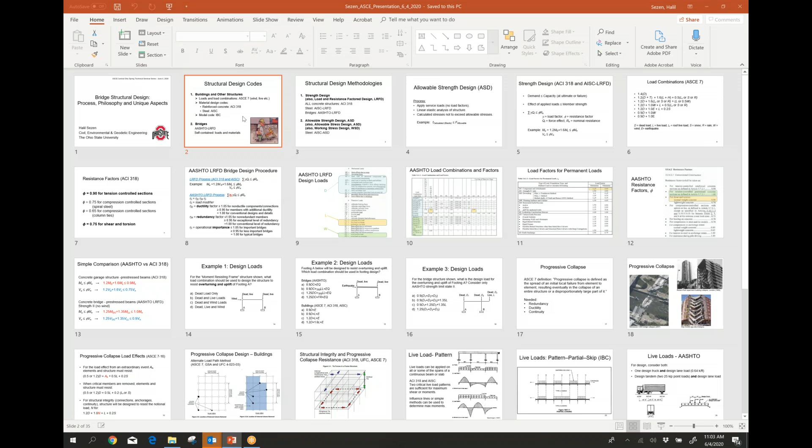Then if you're... Yes, sorry, we're not seeing this. Are you sharing the screen? Because we're not seeing anything. Oh yeah, something happened - this whole thing covered my... All right, do you see it now? Yes, we see the entire - okay, slide. For some reason, the chat screen on the side covered my entire screen. So please remind me if something goes wrong again.

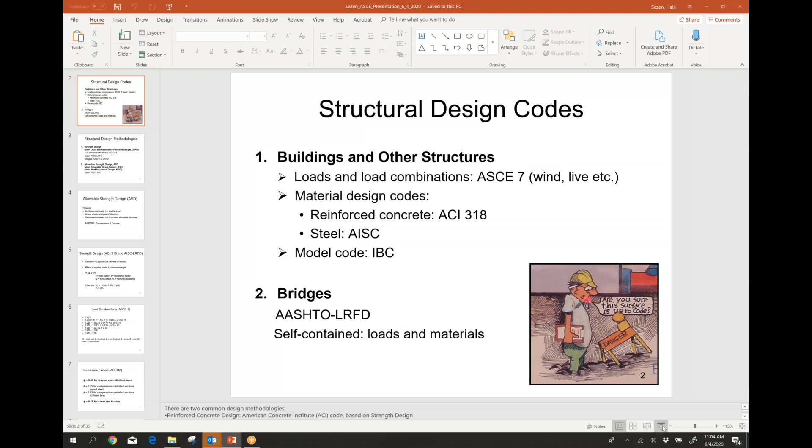All right, so I was talking about ASCE 7. That's the standard that governs all load calculations. But then if your structure is a concrete structure, then you must follow ACI 318. Or if you have a steel structure, then you have to use the AISC construction manual where you can follow either LRFD or ASD, but AISC is the governing code for steel material. And if you have a timber structure, then you have to follow NDS. A bunch of codes are governing the design of certain materials. And we also have this umbrella or model code called IBC, International Building Code.

That makes things very convenient, because for counties and states and cities, if they want to deal with many different materials, it is very tough to adopt fire code and ACI and AISC differently. IBC pretty much combines all of them. So if the city of Columbus or Franklin County or whatever says we are adopting IBC, they automatically adopt ASCE 7, ACI, all these codes, and IBC adds a little bit of exceptions to that. Pretty much it is the same thing as other codes - there may be a little bit of modifications here and there. So this is how the system works for buildings and other structures.

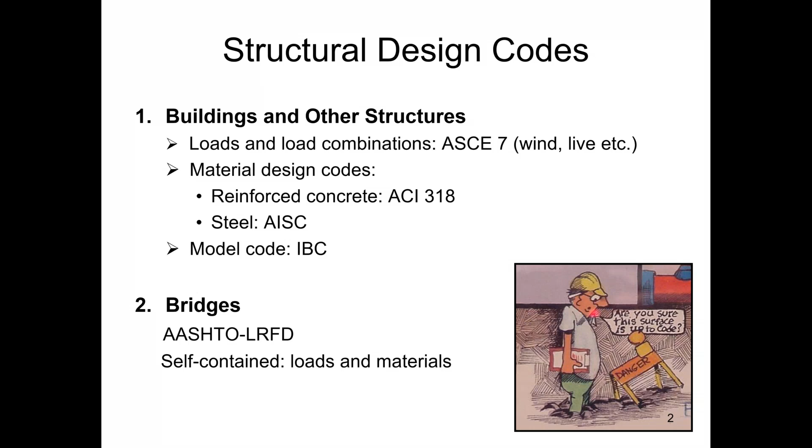Now in this presentation, I will be mostly focusing on ASCE 7 for load calculations, and I will keep comparing AISC or IBC to AASHTO just to show the differences between the philosophies or thinking of these design codes. So it will be a good idea to keep in mind what ASCE 7 is, what IBC and ACI mean for building or other structural design, to understand how things work.

So if you are designing a structure out there, any structure, at this point in time we have two different methodologies. The first one is the common one, and probably the second one will disappear over the next maybe 10, 20 years, maybe longer. The first one is called strength design, or load and resistance factor design, LRFD.

Concrete structures, whether precast structures governed by PCI or ACI, switched to LRFD or strength design completely in the mid-1970s. So since then, all concrete structures are designed following LRFD. There's no other way, there's no other option.

Versus steel structures, even today, can be designed either by this LRFD or the ASD, which is the second methodology. You have the option as a designer to pick and choose. It is the same story with masonry and timber.

Intentionally, I'm not talking about masonry and timber because they are less applicable for bridges. They are more or less like steel material as well. They are in the stages of shifting from ASD to LRFD.

Older engineers tend to stick with ASD, and they like it because ASD is easier. But technically, from the theory point of view, ASD has some deficiencies. So the future is LRFD and strength design. That's the right way to go, but it takes time to switch to that methodology. So just to put it out there, we have those two options.

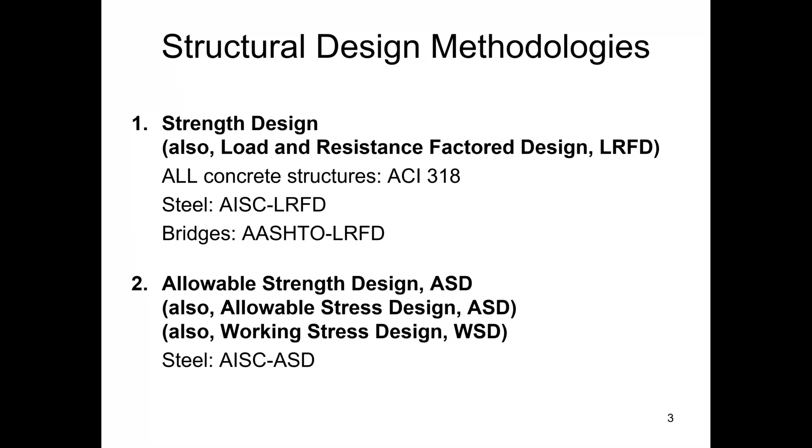As I was saying a few seconds ago, all bridge structures starting with the 2010 edition of AASHTO had to shift to LRFD completely. At this point in time, bridge design follows the LRFD procedure.

Very briefly, what is allowable stress design? If you have a bridge structure, you need to check your stresses and deflections and many different things, in addition to design of individual components. So all you do is take the loads that are supposed to be applied on the structure during its lifetime, and you do structural analysis.

Then you calculate the stresses in terms of stress checks, for example. The first term that you see here is the stress that you calculate from your structural analysis, and then you compare that with the allowable stress for that material.

So if this is, for example, a steel structure, then AISC code says for the design of a beam, the allowable stress is equal to, let's say, 60% of the yield strength of the steel. If your calculated maximum stress is less than that limit, you are done. If not, you have to go back and change your design.

Same thing for masonry or timber or whoever is following ASD. So the process is relatively straightforward and simple. That's the reason older engineers don't want to shift to LRFD. So this is how ASD works.

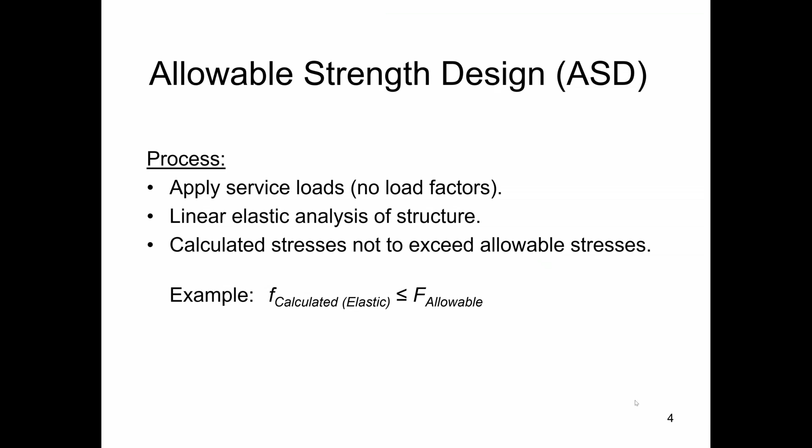So when it comes to strength design, there is no such number as factor of safety. Please remember that. All concrete structures at this point in time must be designed by LRFD or strength design. And if somebody says, what is the factor of safety for this concrete beam, shear design or flexural design? The answer is, we don't know, because the factor of safety is embedded in the process.

So what is the philosophy behind strength design?

I removed that red dot because it was giving me a hard time. We calculate the demand on the left-hand side, which comes from the factored loads. MU is the maximum moment from structural analysis, and you multiply your loads separately by certain load factors. M sub D is the maximum moment from dead loads, amplified by 1.2, and live load moments are amplified by 1.6. Those factors come from ASCE 7, adopted by AISC or ACI as a general process.

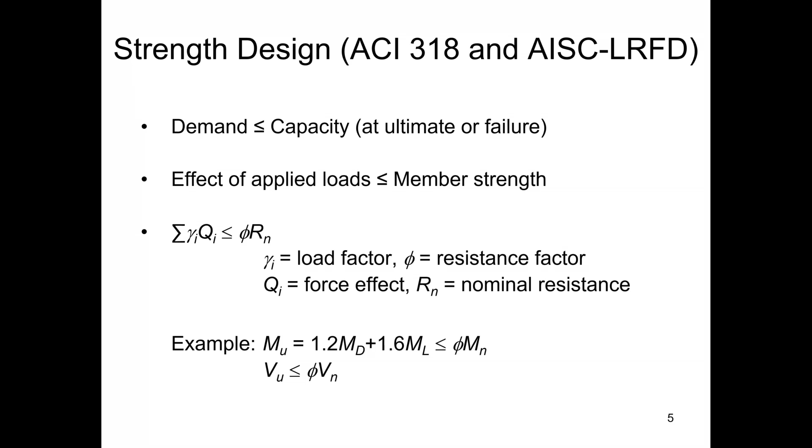I assume most of you already know this, so I hope this will be a quick refresher. Now let's see how strength design or LRFD design is implemented. As I mentioned earlier, ASCE 7 is the standard that governs all the loads and load combinations, and these are the 7 load combinations we have to follow.

D is the dead load, E is the earthquake, L is the live load. These are the load combinations you use to analyze your structure, ideally 7 times. Whichever load combination gives you the largest moment, axial load, or shear, you take that as your design force, and then make sure it's less than the capacity—that's how the design is done.

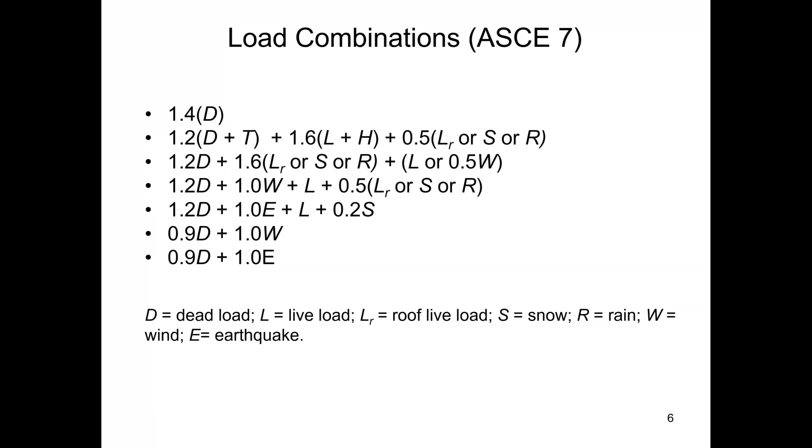Luckily, we have computers these days, and we can analyze the structure 7 times. In most cases, we know that one or two of these scenarios or combinations will govern our design after you keep doing the design.

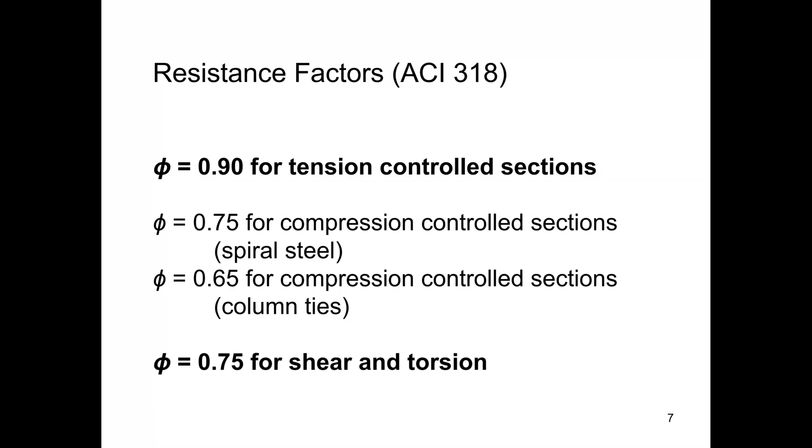If you are using AISC for steel design or timber, we have similar factors. This is just an example for concrete structures: for flexure, it's 0.90, and phi factor is 0.75 for shear design, just to do a quick comparison a little bit later. Okay, so now let's compare the process for bridge design versus all other structures.

Just to remind ourselves, near the top of the slide I repeated what I discussed so far. The LRFD process for buildings and other structures requires that MU is less than or equal to phi MN, or VU is less than or equal to phi VN. That's the representation. In AASHTO, though, it's exactly the same process, except for one little difference.

That's the red pointed eta factor. That eta factor is called the load modifier, and it includes 3 different factors: ductility, redundancy, and importance. I put them in bold near the bottom of the slide.

As you can see, depending on whether your structure is brittle or non-ductile versus highly ductile, you may be able to reduce your demand or loads by 5% or increase them by 5%. So if we pick, for example, eta R, the redundancy factor—if your bridge doesn't have any extra members, or is highly non-redundant, then there's a penalty for you. You are required to increase your loads by 5%.

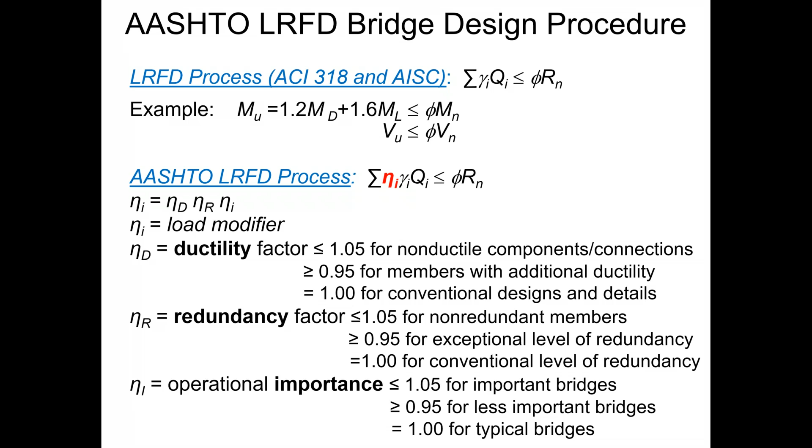So AASHTO uses a slightly different approach—regardless of the loads applied on the structure, it says you need to use these three load modifiers, and the rest of the process is exactly the same as other structures. Obviously, the load factors and phi factors are also different from ASCE 7, and we'll see them in a few seconds. There are a lot of unique differences between bridge structures and buildings and other structures.

So this is one of them: it's the nature of bridges, and all the soil loads and the wearing surface and components are treated a little bit differently for bridge structures, and as it should be, it's the right way to do it. Just to pick up the top two loads, DC and DW—they are treated as a single dead load in ASCE 7. So if you were to design a bridge structure according to AISC or ACI, just for the sake of discussion, you cannot separate DC and DW.

DC is the standard dead load for all the beams, columns, and components. DW is the wearing surface, asphalt-like material that you replace every 10 or 15 years, whenever it's supposed to be replaced. So by definition, dead load is the permanent load, right? But as soon as you remove that wearing surface, suddenly it looks a little bit like live load. So AASHTO takes care of that and increases the load factor for the wearing surface.

That's the reason they have DW and DC separately—they are treated differently. Same with soil load: if you are designing a steel or concrete structure that is not a bridge, soil is pretty much treated like a regular dead load D. Same with live load.

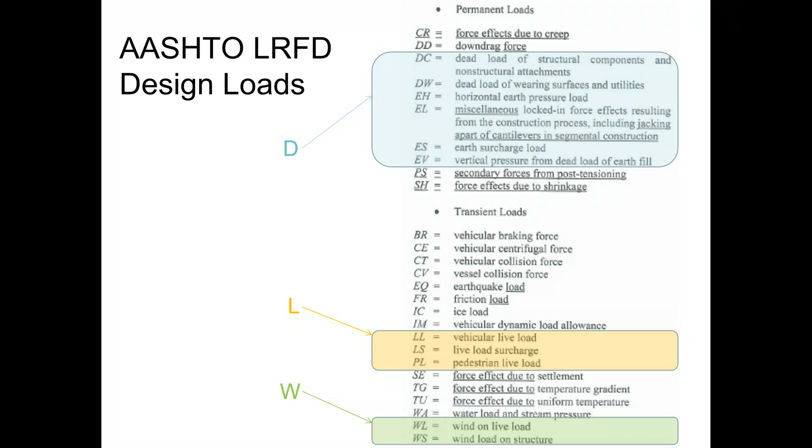I just highlighted in orange: whether you have vehicular load or pedestrian load, live load is live load in ASCE 7. Same with wind load, wind is wind, and there's only one load. But for bridge structures, they need to be treated a little bit differently because of the nature of the loads.

A few slides earlier, I showed you some load combinations from ASCE 7. Now, when we look at the AASHTO bridge code, those same load combinations, in a slightly different way, are repeated in those 7 rows highlighted in blue in the first column. They go all the way from Strength 1 to Strength 5, and then there are a couple of Extreme Event 1 and Extreme Event 2 load combinations.

All you do is, for example, if you're dealing with the Strength 2 load combination or limit state, you go to that row, and in the second column you have all the permanent loads or dead loads, which you multiply by the gamma P factor - I'll discuss that in a few seconds. Then for Strength 2, you multiply your live loads by 1.35, and continue through the rest of the table. If there's a load factor for another load like temperature, you just multiply them, and that's your load combination.

Like we said for ASCE 7, you have to repeat your analysis of the structure 7 times ideally, and then whichever load combination gives you the largest axial load, shear, or moment, that's your design demand.

But in general, for bridge structures, you don't need to do 7 analyses. Rather, you pretty much know which one governs the design. If you have high wind, for example, one of those strength limit states governs, or if you have earthquake, as I highlighted, Extreme Event 1 governs, and most likely the other ones will not govern. Or if you have certain heavy live loads, one of them is going to govern. But theoretically, you are supposed to analyze your structure 7 times for all those blue load combinations.

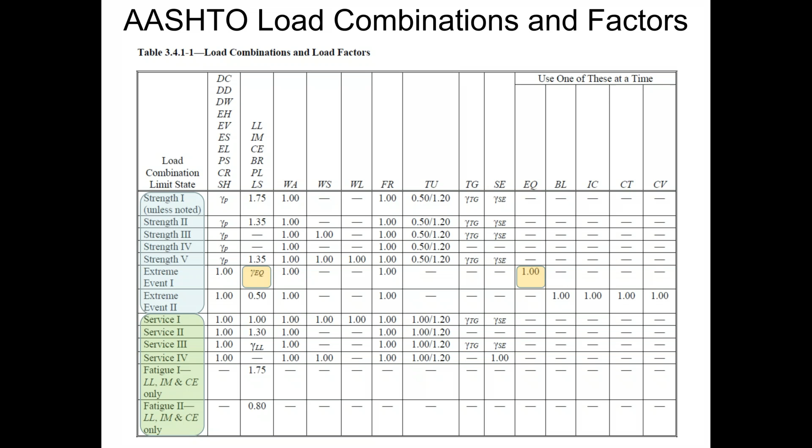Before I go to the next slide, let's also talk about the bottom 6 load combinations. In the first column, I highlighted them in green - they are the service limit states. Effectively, they're picking up the ASD procedure in an indirect way, but we have the same thing for other structures. For example, if you're designing a pre-stressed precast concrete member, you cannot tolerate concrete cracking in tension. So that's why you need to use those service limit states and calculate the stress, making sure it will be less than the stress limit.

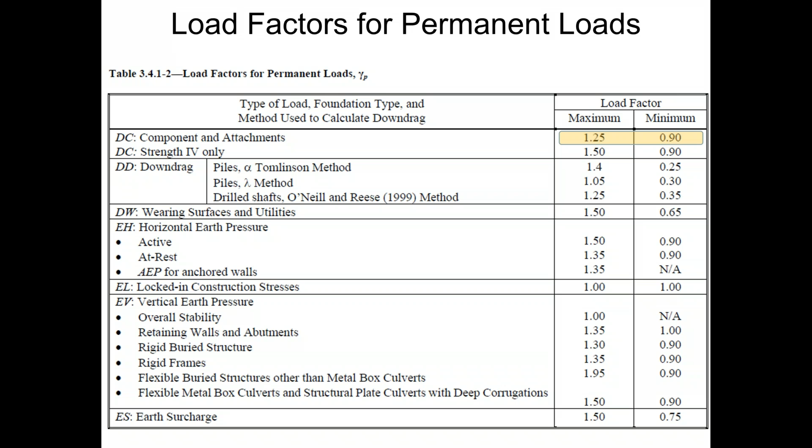This slide shows us the minimum and maximum load factors. We have to figure this out on our own according to ASCE 7, but for bridge structures it's explicit, and as a designer you're supposed to pick the load combination that you need. This was challenging for our students, so I'll have a quick example in a few seconds.

Again, for comparison purposes, if you're designing a bridge structure, look at this slide: for tension-controlled flexural members, your phi factor is 1, and for shear design it's 0.9. I intentionally picked these 2 so we can compare them with building structures.

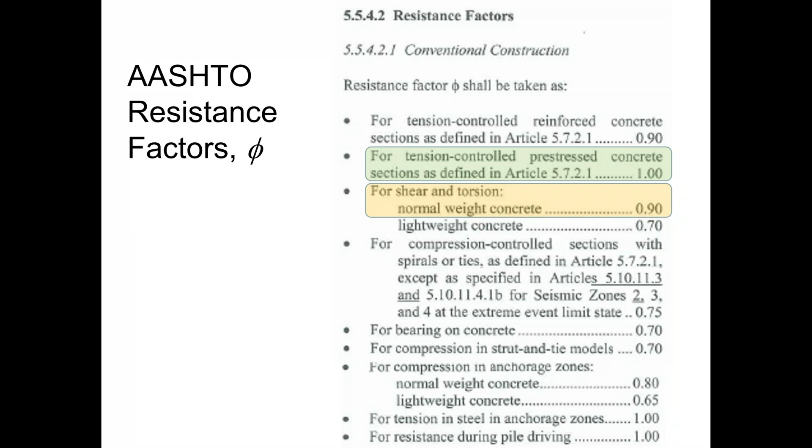If you remember, for buildings and other structures, phi factor was always 0.9. Now it is 1 for pre-stressed members. And also for shear design, it was 0.75. Now, according to AASHTO, it is 0.90. So it is quite a bit different.

So I wanted to do at least one simple comparison here. If you are designing a concrete garage structure using pre-stressed double T beams or precast beams, and you are checking that prestressed beam for bending and shear, then you are supposed to use those two red and blue equations near the top of the slide.

According to ASCE 7, your load factors are 1.2, 1.6, and then your phi factor for flexure is 0.9, and for shear it is 0.75.

Same producer or manufacturer of the precast beam, let's say in Ohio, they may be exactly the same beams produced by a company in Mount Vernon, for example. They do it actually. They ship prestressed or precast beams for a garage structure versus for a bridge.

However, when you design those structures, if you look at the bottom load combinations, suddenly, let's say you are in a zone where wind is not huge or not a major factor in your design. I'd like to do one-to-one comparison.

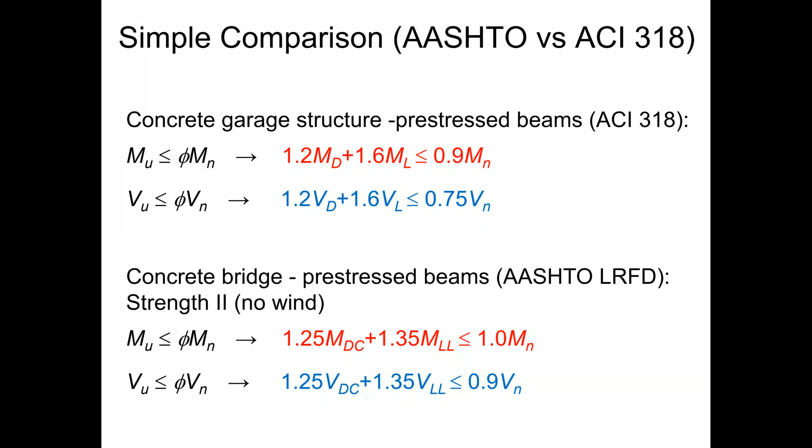So I just wanted to put this out, but the good news is the process is identical. Assuming I handle the eta factor in front of the bridge design, the process is very similar. If you look at the blue and red equations, they are pretty much the same thing if you can handle the numbers. So let's look at a quick scenario here.

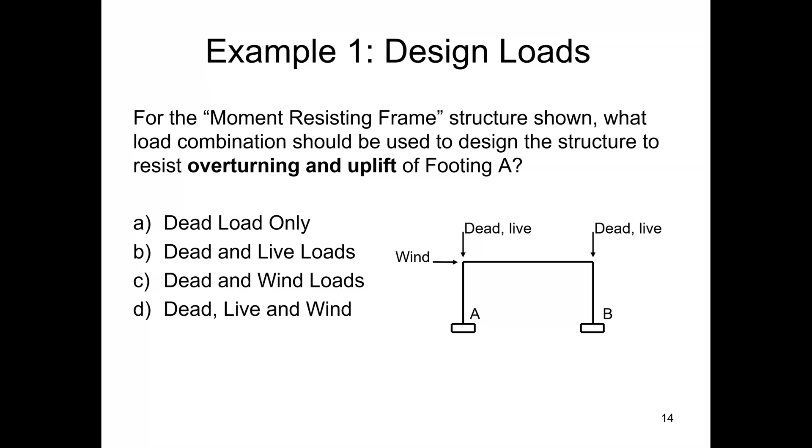So now the question is, if this is a bridge structure or building structure - I put both of them - how would you numerically design your structure? You see, somebody has to literally go in there and pick these load combinations.

The answer is, again, just to move quickly, has to be A in both scenarios. Now you can see that both AASHTO and ASCE 7 became exactly the same load combination, same numbers. Why? Because we should be removing the live load. Suddenly the other options are gone. And also, if you pay attention, I told you earlier that for safer design to be conservative, we need to increase our dead loads, right?

So if you look at the load factor in the correct option A, our dead loads are reduced by 10% to be on the conservative side. Why? Because if you reduce your dead load, your uplift force will be increasing, or your tension in that column will be increasing. That's what we want. We want the largest force. So again, here we are using the gamma minimum. If you are asking where did that 0.9 DC come from?

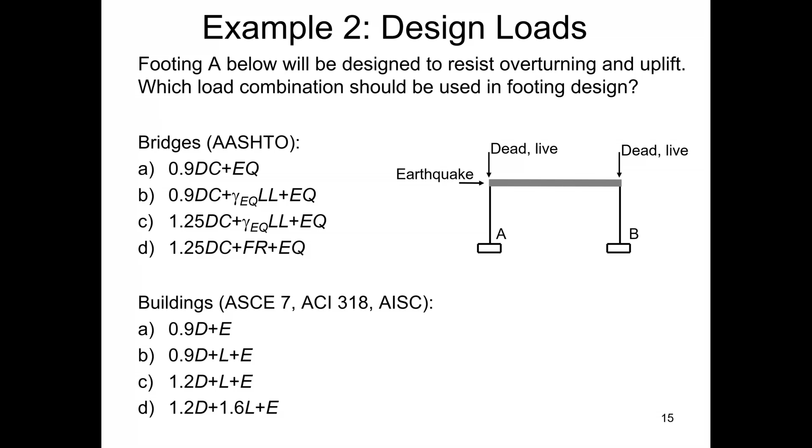See, AASHTO has the minimum and maximum numbers. If you were to design the footing on the left-hand side, then your answer probably will be C for the bridge structure. You see, as an engineer, you decide on that 1.25 versus 0.9. Sometimes things get complicated, like in this example.

Let me give you a few seconds. Why don't you think about this? If you were to be a bridge engineer and if you are designing this footing for just gravity loading, there's no lateral load, which load combination would you pick? Let me give you a few seconds to think about.

Okay, so again, we are designing the footing A for uplift. And dead loads are permanent and we cannot get rid of them. So D1 must be there because it is pushing against that uplift. As we discussed in example number 1, D1 has to be reduced. So the answer has to be 0.9 times D1. So the answer D is immediately out.

And when you look at the cantilever, you have the live load and you have the D3, and both of them are creating a tension on the right end of the structure. So if they are creating tension, if they are creating additional uplift, then their value must be increased. So if you go to a maximum and minimum gamma P factors, then D3 must be based on maximum gamma, which is 1.25. So in this example, the answer has to be C.

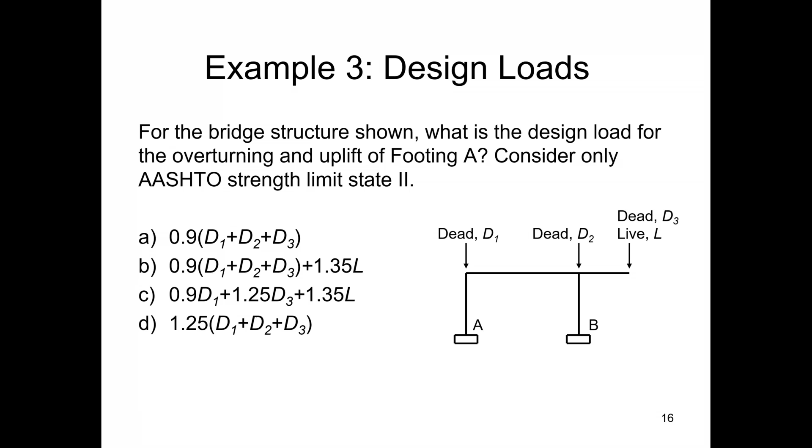Oh, by the way, D2 has no contribution or no effect on the response or design of column A. See, these are all the decisions of the engineer. So engineer has to really understand those gamma factors and think about all possible options.

Okay, let's switch the gear and look at some other items. Progressive collapse has been actually becoming a major problem or design issue, and a lot of companies are doing a lot of work to prevent progressive collapse, especially if you are dealing with government buildings these days. It's almost required since especially 9/11 and over the last 10, 15, 20 years.

So ASCE 7 defines progressive collapse as spread of damage after a local failure happens to the entire structure. So if your structure is designed well, your goal is to be able to contain that local initial failure and just keep it there and not lead the collapse of the entire structure.

Okay, so in order to have a good design and not lead to entire structural collapse or disproportionately large collapse, you need redundancy. So the more members you have, the better your performance is. Ductility is another one. You can get a lot of deformations but not collapse. Continuity is another one. So those are the three major strategies that we do in buildings and other structures.

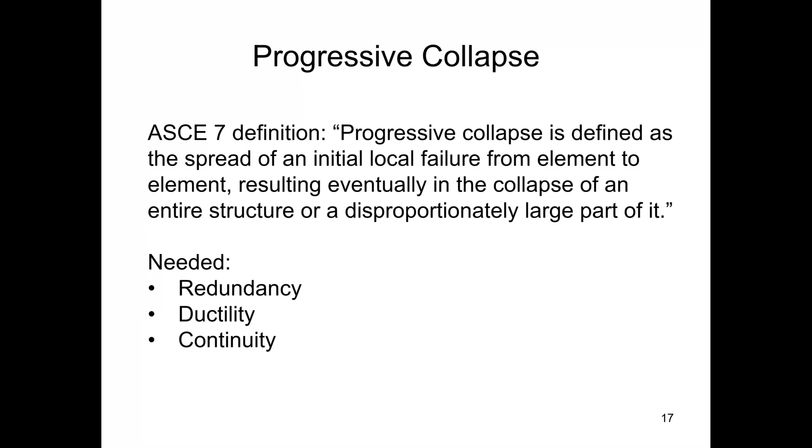If you lose a column in a building, if you can make the beam continuous right above that column, hopefully that beam is going to save the building and it's not going to collapse. By their nature, bridge structures are terrible against progressive collapse because of the lack of redundancy. Bridge structures don't have too many redundant members because it's expensive, whether it is connections or the piers or truss members or beams. So if you lose a member, you tend to lose a large portion of the structure.

So I just picked one. If you look at any bridge structure failure, I will call it progressive collapse based on the definition of ASCE 7. I just did a search a few days ago and picked up this Minnesota bridge collapse, but any bridge collapse pretty much, whether it is because of scour or whatever the reason, fits into progressive collapse definition.

On the building side, this whole progressive collapse resistant design started in 1968 with that building collapse in London. There was an explosion in the upper floors, and then all these precast panels came down, and they started having all these requirements now.

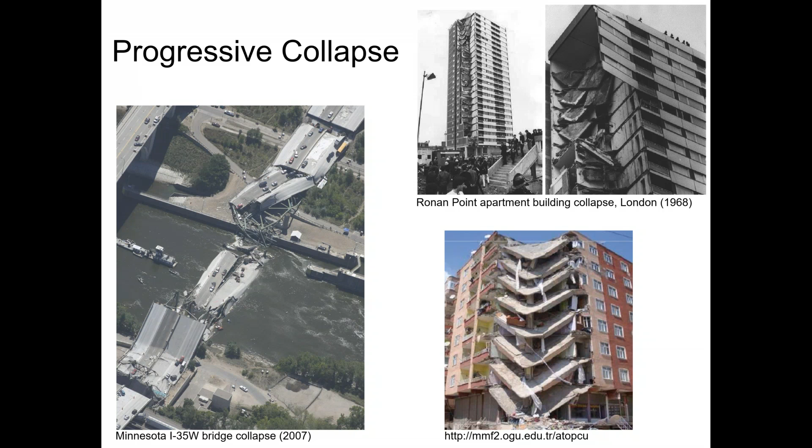On the building side, we have a lot of requirements in individual codes, as well as different standards. I just put a couple examples on the right-hand side for building progressive collapse.

ASCE 7 specifically requires a check for progressive collapse, and this is extremely critical for government structures because there's a requirement there. So there are three specific requirements in ASCE 7. They try to get away from the load itself. It can be because of impact, fire, blast, or even earthquake type things, but they call it an extraordinary event, AK.

They say if you are, for example, designing a government structure in downtown Columbus, then you have to think about certain extraordinary events, let's say a truck hitting a column in front of the building, and then you have to take care of the design using that AK load and reanalyze your structure. This is on top of the 7 load combinations we already discussed.

And if you look at the bullet at the bottom of the structure, you have to check your connections, anchorages, or continuity of the structure for a notional load called N. Again, you have to think about those extreme load scenarios like blast and fire, and make sure your connections and beams, etc., will be able to resist them.

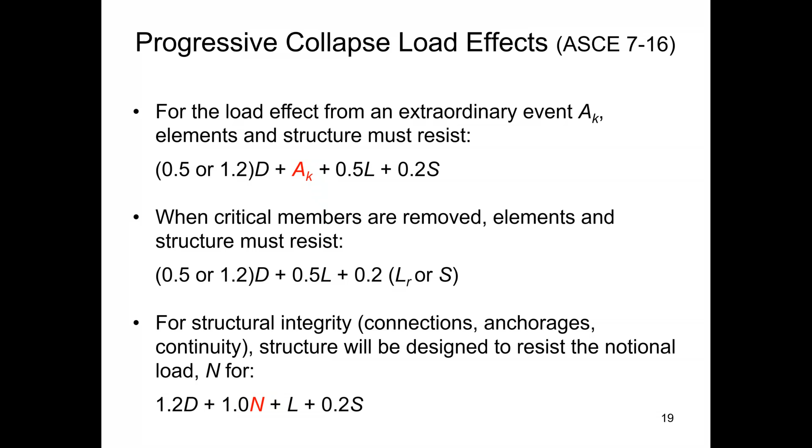And the middle one is relatively well established. From the government documents, you are required to remove certain critical elements and then make sure the rest of the structure will be able to resist the loads defined in that load combination in the middle.

So if I go to the next slide, for example, if you follow that ASCE load combination, then GSA and UFC are the government guidelines or codes.

If you are designing, for example, a 20-story hotel or government structure in downtown Columbus, then you are required to remove 3 columns. If you look at the left-hand side, you are supposed to remove 1 corner column, 1 perimeter column from each side if they are not identical designs. And when you remove 1 column, you have to demonstrate that your structure is not going to collapse.

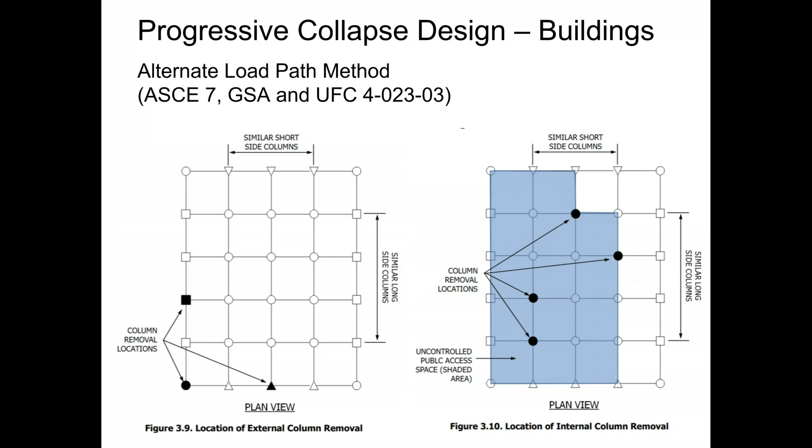That's a requirement. There are many requirements that I don't want to get into details on, but this is called the alternate load path method. You should be able to redistribute loads through that alternate load path.

And PCI or ACI or even AISC have their indirect design guidelines. For example, ACI 318 doesn't want to get into those specific loads. No one wants to deal with impact or blast or fire separately.

Rather, they say we have these structural integrity guidelines where you have to tie things together, especially for precast structures, in the X-Y directions or also in the vertical direction. So if you lose a column or wall, the rest of your structure should not collapse. That's indirectly enforced, and that's what is done.

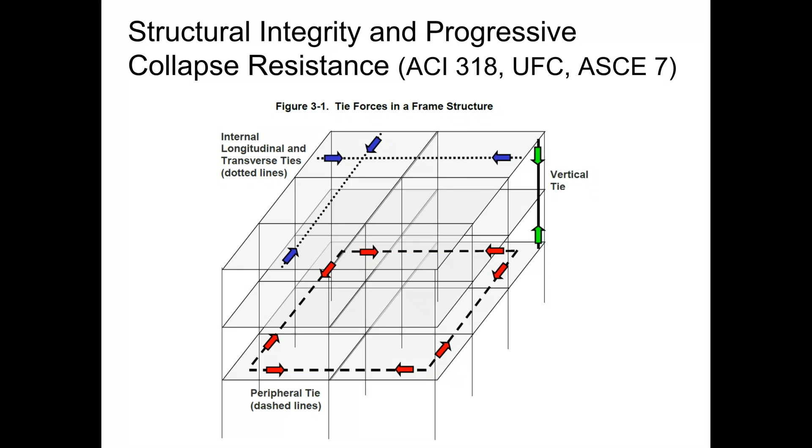Unfortunately, this is somewhat missing in bridge structures, but that's the nature of the structure. They are expensive, and you have to deal with them separately.

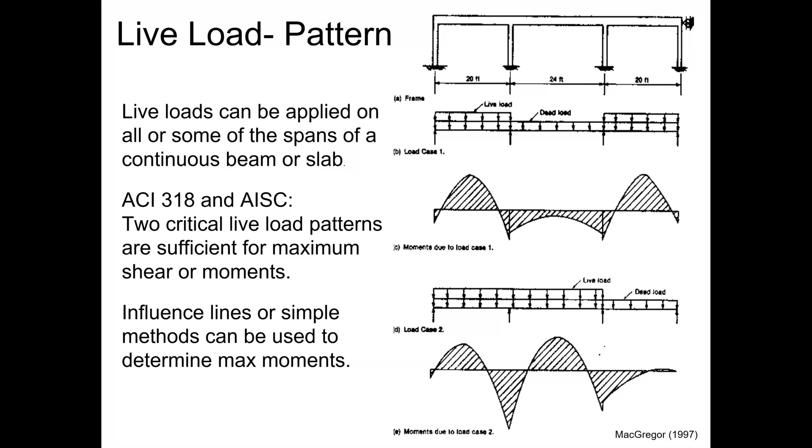One major problem with bridge structures is the live load. For building structures, you may have many spans and your live load may change. So if you put your load in two adjacent spans, or one span loaded and the other skipped, that is acceptable according to ACI 318 and AISC, and IBC is the umbrella code. That's what they specify. As long as you analyze your structure a few times for these load scenarios, you are done with live load variation or distribution.

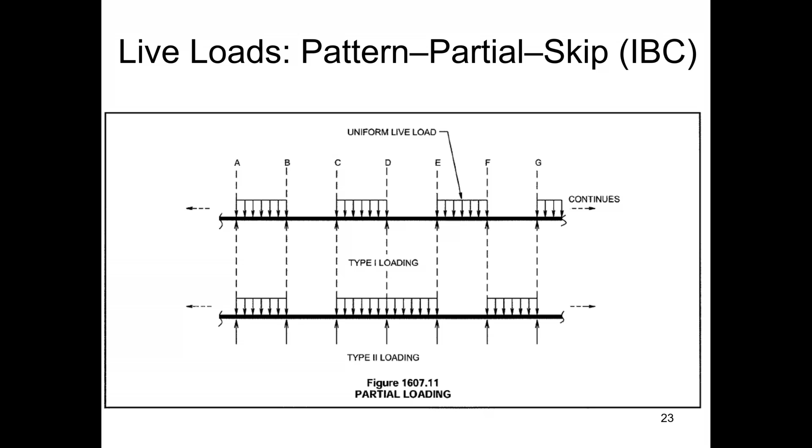Versus this is a major problem with bridges, because your truck or unusual load can be anywhere on your bridge. So you are almost required to have some kind of influence line type analysis. I just wanted to point out here that any bridge you are designing must be designed or analyzed 2 times.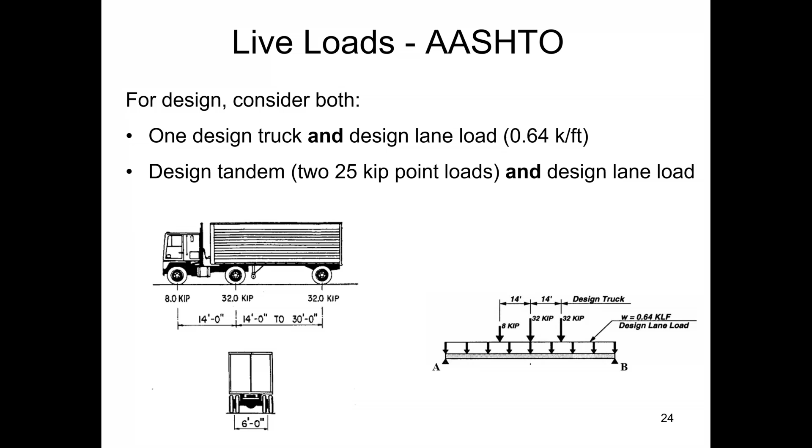Following the guidelines, the challenge is where would you put your tandem or design truck to design the bridge. It may be easier for a simple, simply supported single-span bridge, but if you have a multi-span bridge, that becomes an issue.

For example, if you are designing the bridge deck supported on girders, you have three options. You can either do a detailed finite element analysis, but that's expensive. People don't want to do that and try to avoid it as much as possible, because you also have a lot of options for where to put your loads.

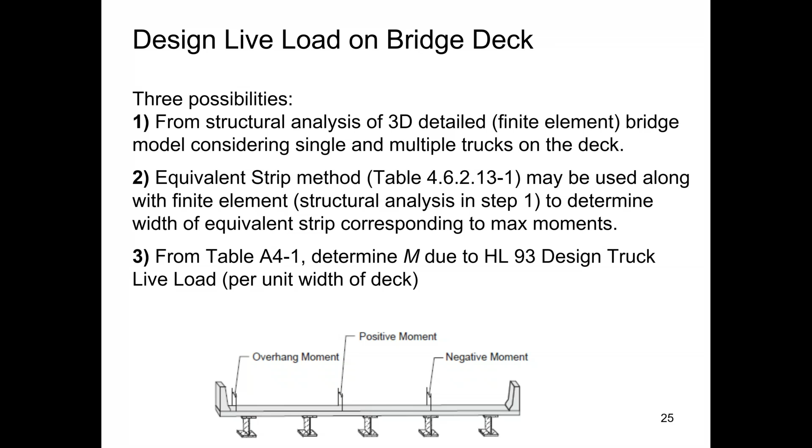AASHTO gives you a couple other options. You can use the equivalent strip method, which is not so easy, but at least simpler than the first option. Then there's a very simple design option, number three, which I want to show on the next page.

As long as you meet certain criteria, AASHTO gives you a table, just as an example. If the distance or span between the girders is, let's say, 6.5 feet, you go to this table and find that your maximum positive moment between the two girders is 5 kip-feet, read directly from that blue highlighted row in the table.

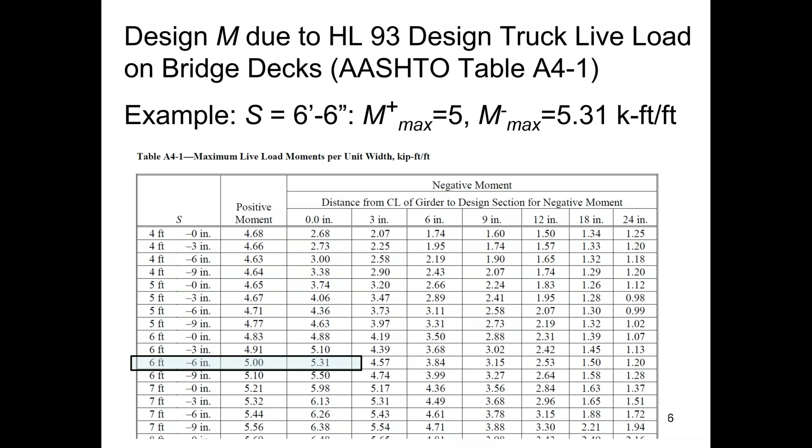AASHTO is very good at providing some of these simplified approximations, but in many cases, because of the nature of bridge structures, you are pretty much forced to do computer analysis, unless you have a very simple one-span bridge structure.

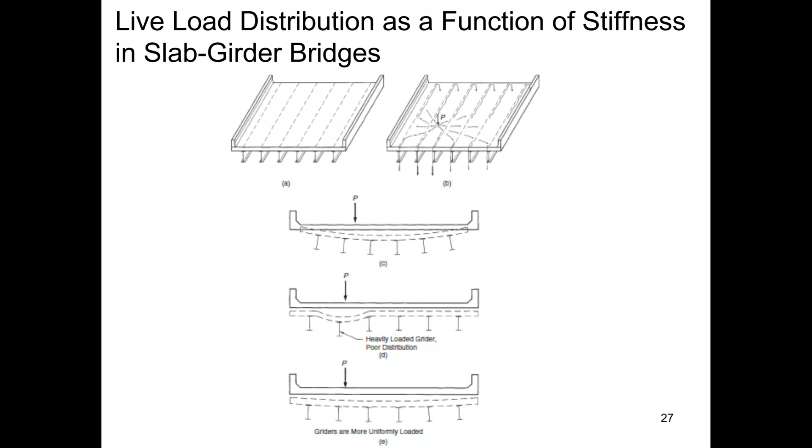I hope those three scenarios give you an indication of how they may look. The demand for the interior and exterior beams will also be very different. If your deck is too rigid versus too flexible, you'll have very different scenarios.

Again, to get around that, if you have this type of bridge, AASHTO gives us approximations so we don't need to go through 3D calculations. But if we don't meet the simplified rules, we have to do computer analysis.

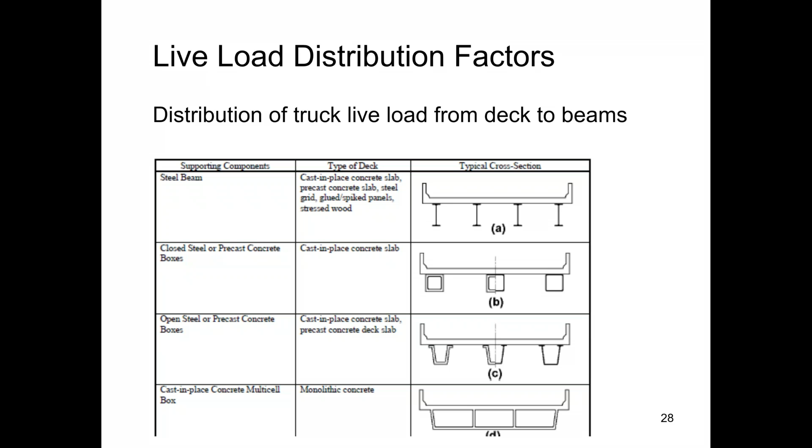Or if you have multiple lanes loaded, they give you another option so you can see the effect of live loads. If you look at the last row of this table, there are a lot of requirements. So if your bridge is a little skewed or unusual, or if other things are going on, you're suddenly forced into some kind of computer analysis.

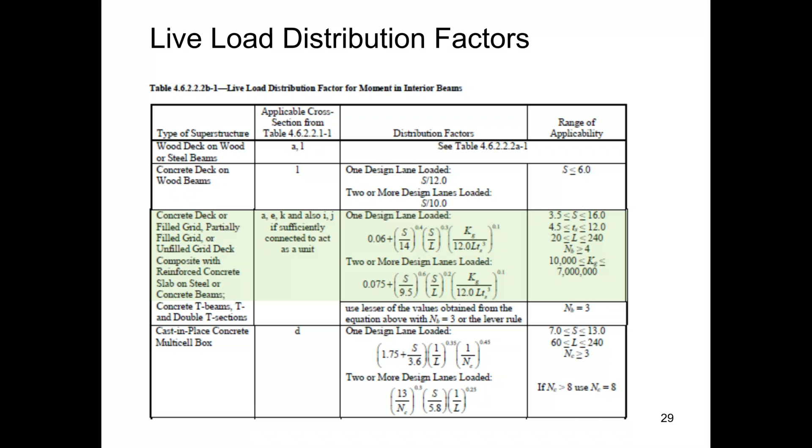I'll get to that in a few seconds. Again, if you have multiple lanes loaded versus one lane loaded, and depending on where your truck is, your results are very, very different. Live loads are very challenging.

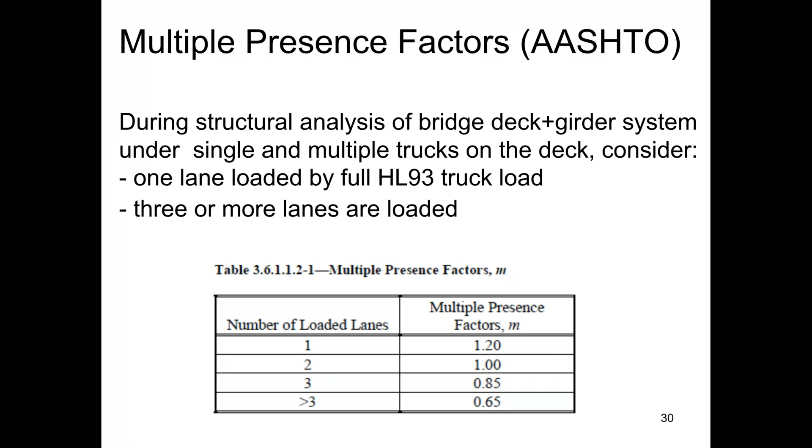Again, if you're allowed to use the simplified tables I just showed you, without getting into detailed numbers, you can use these simplified multiple presence factors and distribution factors to come up with the live load effect.

This is just one simple example. If you are designing girder number 1 at the far left end, you need to consider several scenarios. One scenario is to have that truck on the edge, truck number 1, and nothing else, then use the multiple presence factors and assume there may be other trucks.

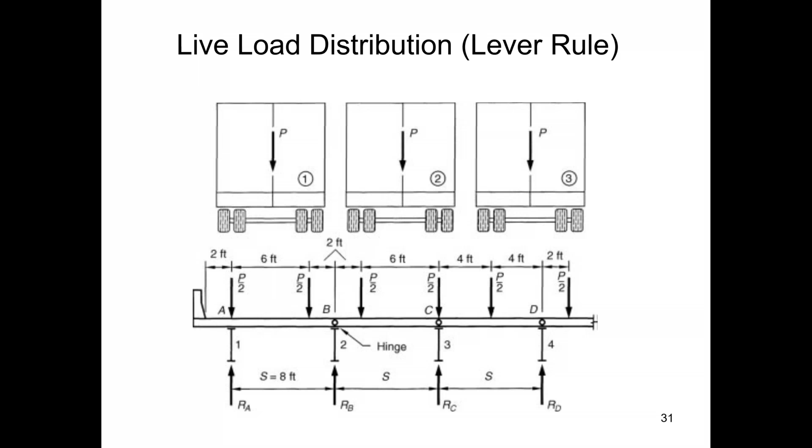So things are very complicated. In some ways, if you are allowed, I will go with these simplified procedures, because doing these things using a computer is also very tough - you have so many scenarios, so many possibilities, it becomes quite challenging. And then another challenge is how accurate your computer models are. So your other option is, if you don't want to use, or if you can't, or if you are not allowed to use them, is to use influence lines. If you use a single 2D analysis, again, you have a lot of approximations.

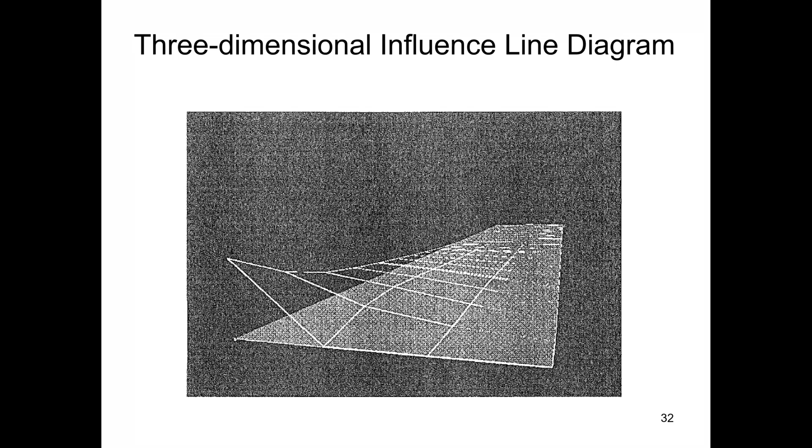So in this simple example, this is supposed to represent an influence line for a connection or connector on the left end of the structure. As you can see, for the rest of the structure, there's not much influence going on. But if your truck is moving right along that left edge, then you will have huge demands on that connector. So even developing these influence lines is tough.

So I think I've mentioned a few times by now, bridge structures are very challenging. That's the reason we have that value engineering you heard about a few times over the last week or so. And then typically multiple independent engineers check the design, as it should be.

Because if I have a simple bridge - not that simple, but relatively straightforward - a prototype shown on the left-hand side, I have several options to design and represent that bridge. I can go with the full finite element model, or a grillage type model in the middle, or a spine type model on the right-hand side. I can even turn this entire thing into a single 2D line. So I have all those options.

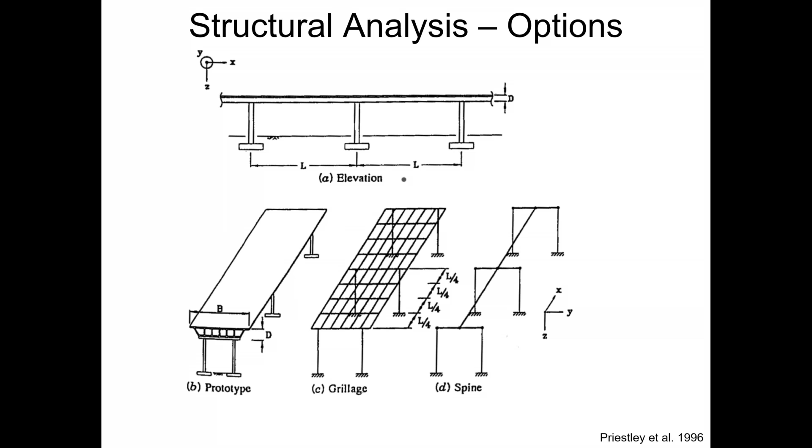But if my results are substantially different from someone else using the other options, then there's an issue. I intentionally picked seismic analysis because for seismic design, in certain cases, it is perfectly fine and allowed to have a single degree of freedom system, a lollipop shown on the left end. That's the simplest representation. Versus, to design a connector or connection or a single element, you may need to do a finite element analysis, which is on the right end. And in certain cases, you may need to develop the finite element model for the entire structure. So the question is, which one is correct, which one is wrong?

In most cases, there is no correct or wrong answer. So I can take this bridge and ask two separate companies to design it using two finite element programs. One company may come back and say stress at that critical location is 100 KSI, and deflection is 5 inches. Another company may say stress is equal to 80 KSI, and deflection is 1 inch.

So it is not necessarily that one company or one model is wrong and the other is correct. Rather, now they have to sit down and reconcile their modeling assumptions or analysis assumptions. I believe both companies or both engineers have a right way of thinking in their modeling, but there are many options even for the same software.

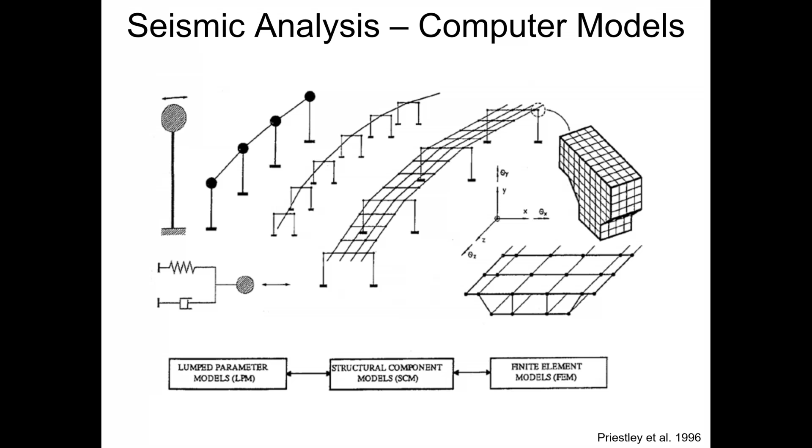So bottom line is, there should be multiple analyses, rightly so, and then there should be reconciliation, and then maybe a third independent check either from a DOT or from another company, to make sure all the modeling assumptions and analysis assumptions are acceptable. So I just wanted to put a few concluding remarks here.

If you are a good structural engineer - I've seen several of those - and if you have the opportunity to work for a company dealing with industrial structures or buildings, and if you are a bridge structural engineer, you can easily go to that company, and the process and analysis will be very similar. You already have the background knowledge.

If you are working for the building industry or some other structural firm, and if you have the opportunity to move into bridge structural design, you can easily handle things if you have the mechanics and analysis knowledge. If you have a PE, for example, I wouldn't see any major issues. During the first 6 months or so, you will learn a lot of jargon and the basics, and you will just keep learning.

That's obvious, but at the end of the day, the process is very similar. It took a couple of years for me to learn certain things in bridge engineering design, but at the end of the day, it is the same process. I've seen some engineers doing that, so if you feel like you are doing a good job in one company and switch to or from bridge engineering, that's not a scary thing to do if you know the process.

Although there are unique differences, design of a bridge structure following LRFD versus building design is not too different. It is the same process. There are different factors and calculations and things like that. The live loads are the most challenging parts of bridge design. That's normal, and if you want to handle those, mainly live loads, then you are almost required to have influence lines or some detailed computer analysis.